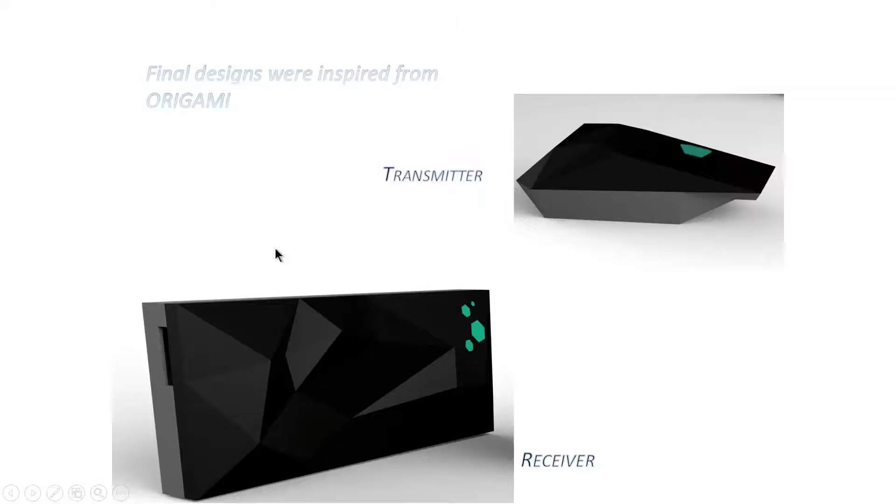Now, how do I play around with this whole thing? So, what was decided is nothing prevents us from charging a device continuously like this. So, say I have this beautiful device, why do I not pack it with batteries and connect it to my usual USB output, and then it keeps charging continuously, and once the battery is charged I can go around playing with it.

So, 2-3 different strategies have been made. One of them is take all the energy and store it in a battery. Secondly, make sure that no heat is lost, you insulate it, and thirdly you need to do some temperature control.

Some of you would have seen these devices which we use all over the place, especially wherever we have mosquitoes. This is a mosquito mat thing. This one uses a bottle and then there is a ring heater all around, and then I was trying to see, can I use that piece which is inside. So, after having searched everywhere,

we got this thing. This one is a heater which is built into flat mosquito pads. So, at the bottom we have a heater and the whole thing has been put together. Typically the rating of this is about 5 to 7 watts. So, we did an experiment on this with 5 to 7 watts, and then this one is taken from a human insulin thing which comes,

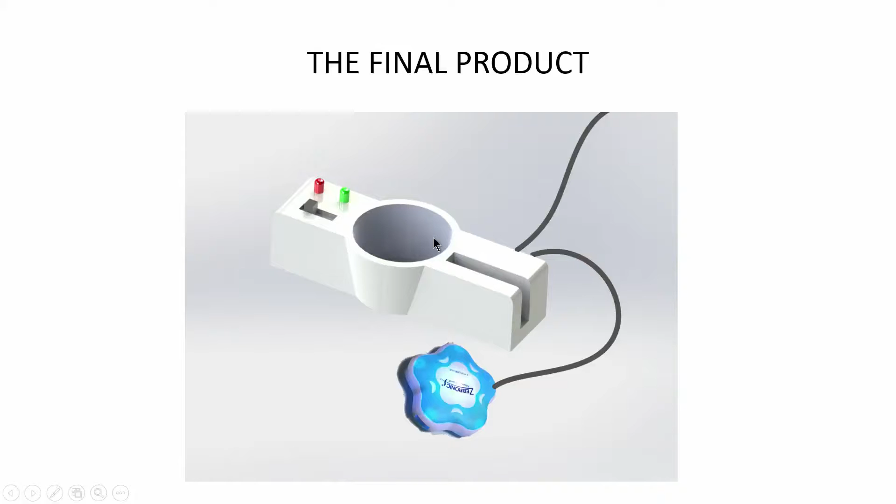So, if you have water, water does not evaporate very well when it is around 60 degrees centigrade or so. Only if it reaches 90-95, evaporation starts. So, normally, constantly keep it at 50 or 60 degrees centigrade.

Whenever you want to make tea, flip a switch, let it come up to the maximum, typically 90 degrees, and the moment you have 90 degrees, and there are two switches in, something which indicates the temperature, put either tea leaves or put a tea bag, and then steep it for whatever time you want and then take it off.

Now, we have a beautiful arrangement by which I have a tea warmer which is also a tea maker, and you see, life is very easy and convenient for me. And the same water, if I can take it and do something, I can even put it in this teacup device which I have here.

So, when we got this, it was not sitting comfortably on this, you see here. Because of the standardization, we need to offset it a little. So, my students have been good enough to make an adapter for me. So, the adapter sits on this, now I keep it here. So, probably I will heat water, or if the water is heated I put it inside,

and I have a nice beautiful valve here, and I use it like this, and these people have given me a very convenient coaster also. So, I have a beautiful thing here, it sits conveniently here, and maybe I can even keep it here and do whatever I want with it. So, I have a beautiful teacup warmer, tea maker, coffee maker.

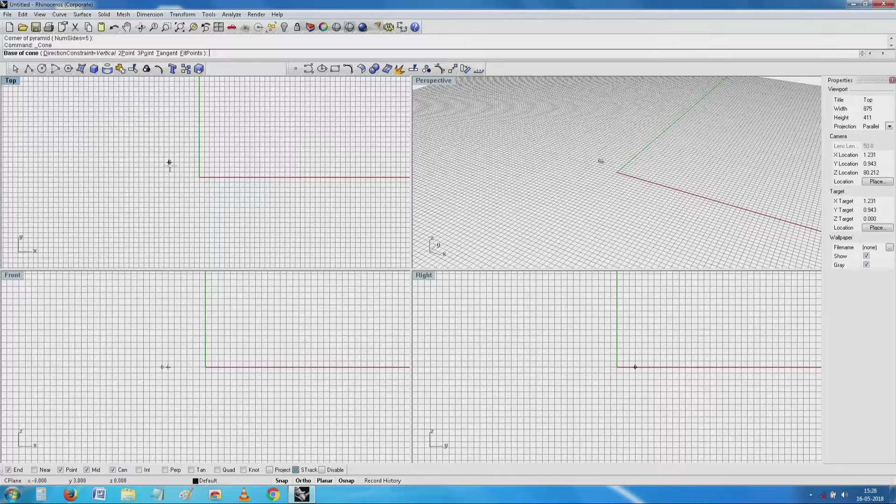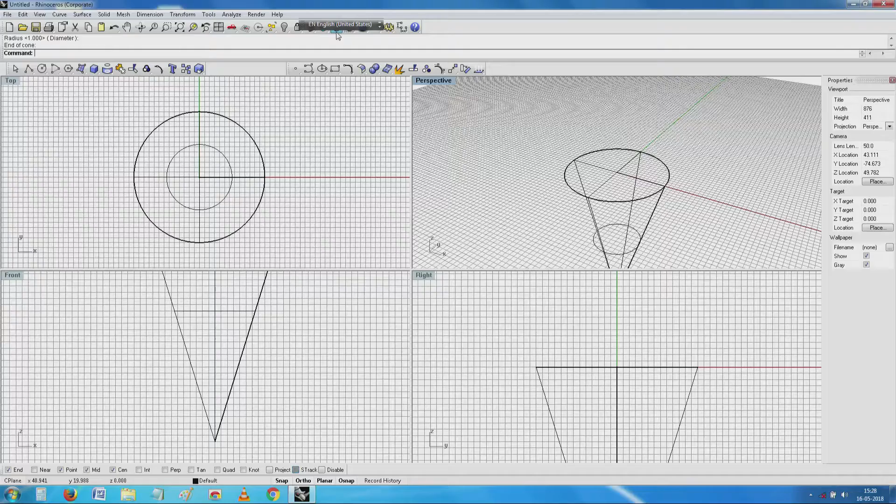See, actually there are better ways of building. See here, I have a cone already in this. How about the angle and all that? You just need to go to the shop and find out which one of these things is better for you. Now, I see what best I can do. Is there a way of making it into that product which I have shown you?

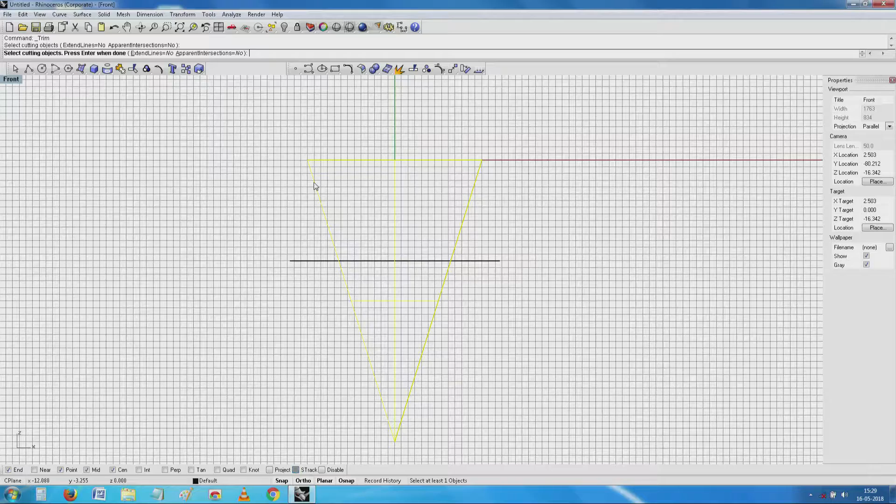The easiest is obviously to cut this. Okay. So, I have here a surface which is a cutting plane. I take this object and I try to trim it off. See, I have got something here which, if you remember in one of those pictures he has shown you, be careful about the thing.

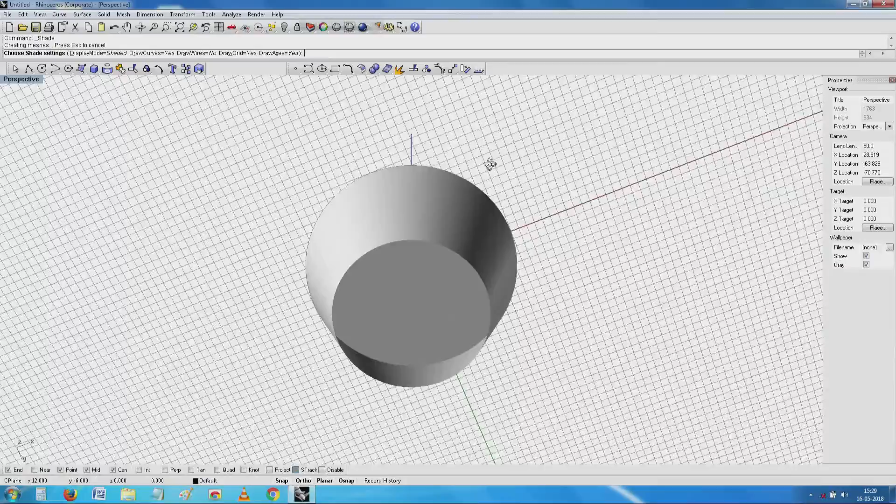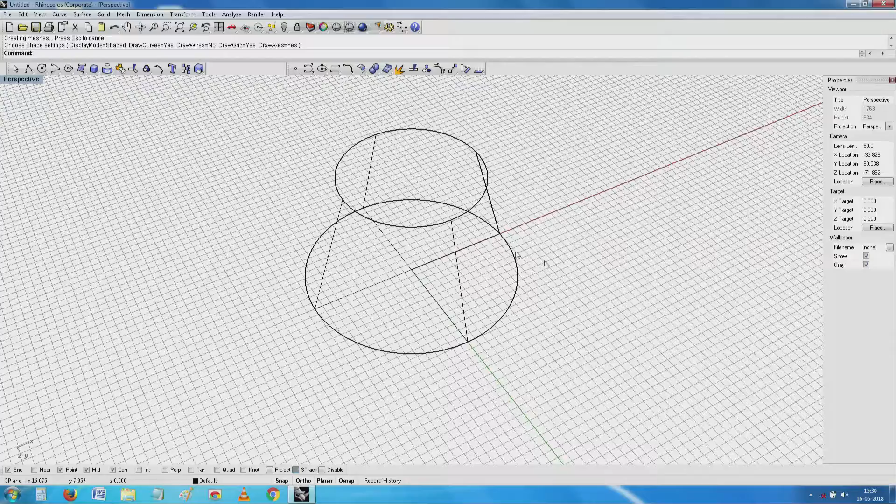This is a shortcoming of this particular program. This is not a universal thing. In this case, this being actually a NURBS based surface modeler, if you do trimming, it will end up with this. Logically, I should have done a normal regular Boolean operation. So, I will go back and do a Boolean operation and show you how stuff is easier to do with that.

See, here I have this. Now, I take a solid and cut off the material at the bottom.

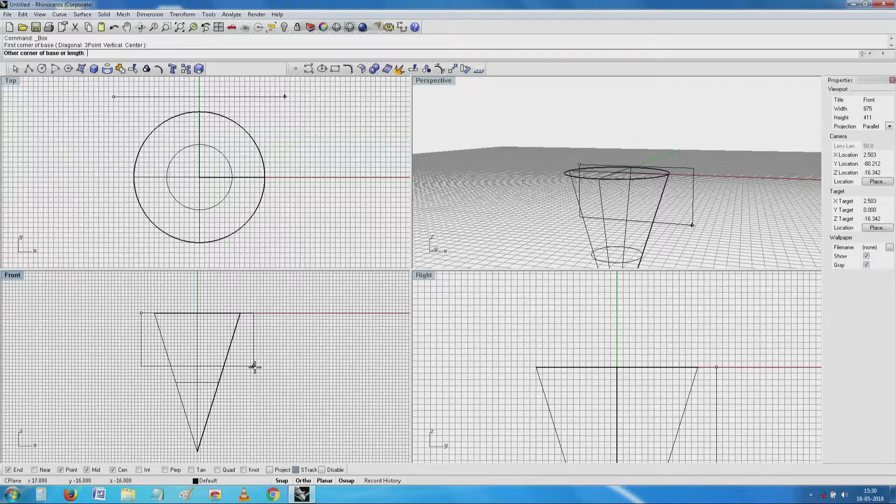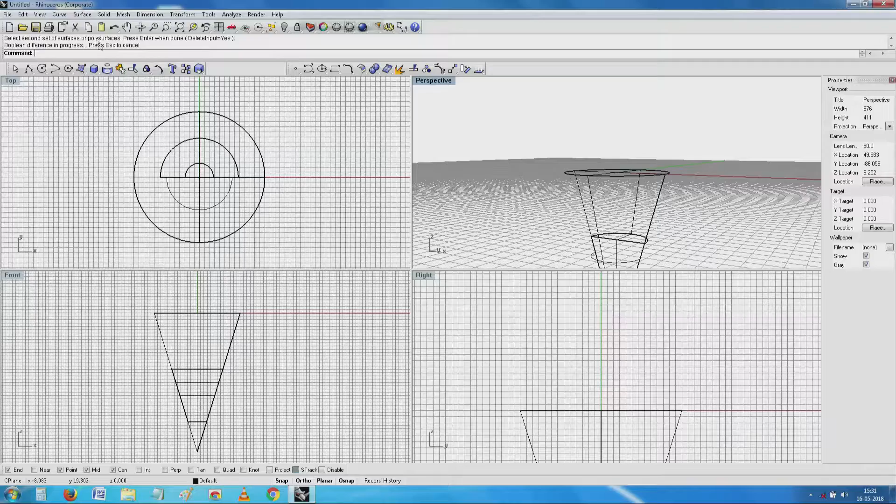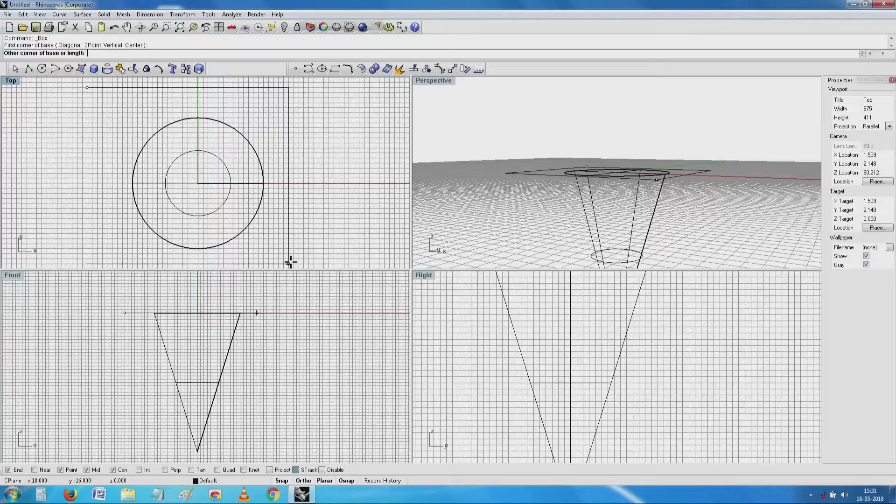Hey, what happened? Oh, very good, very good. It was not sitting here properly. See, here it is only sitting halfway. Serves me right. Now I see, I will try to, oh, it is not done properly, sorry. I make a proper solid. Take it down. Now do a Boolean.

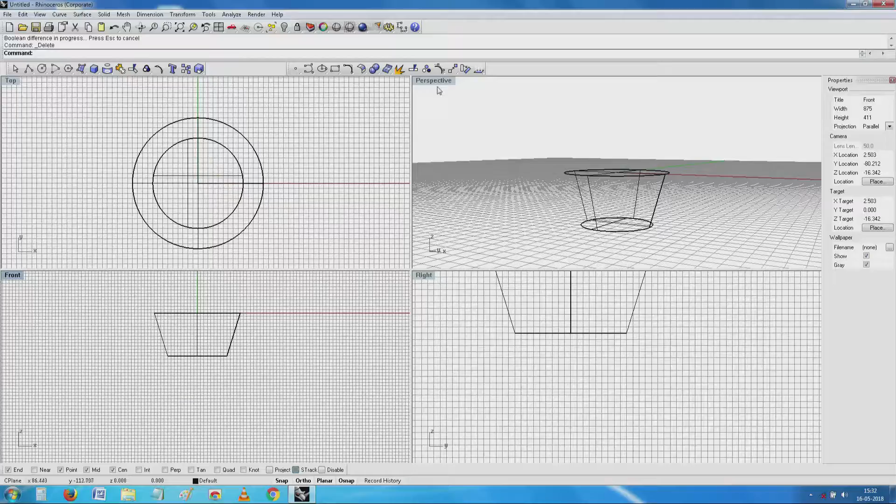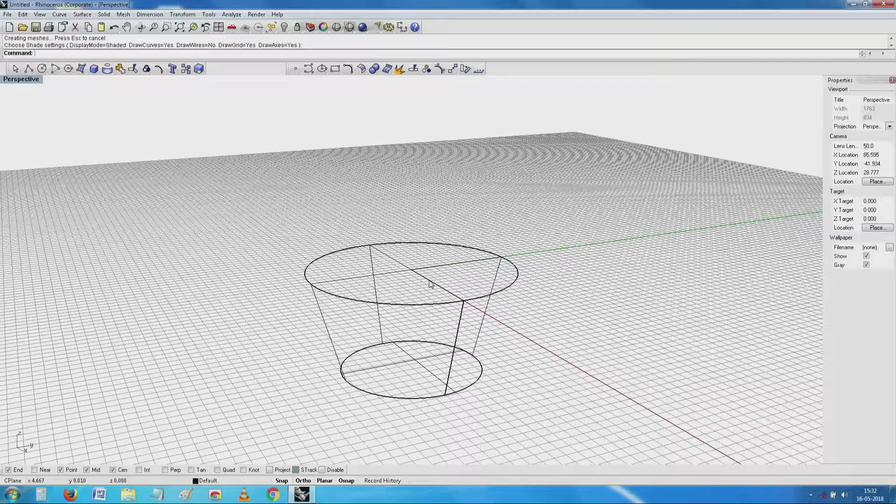So, here I have a reasonably well done cup and it is closed on both sides, okay. Top and bottom sides, both of them are closed. I am just trying to create a hollow cup. So, what I do now is make it a hollow cup by probably copying on itself again.

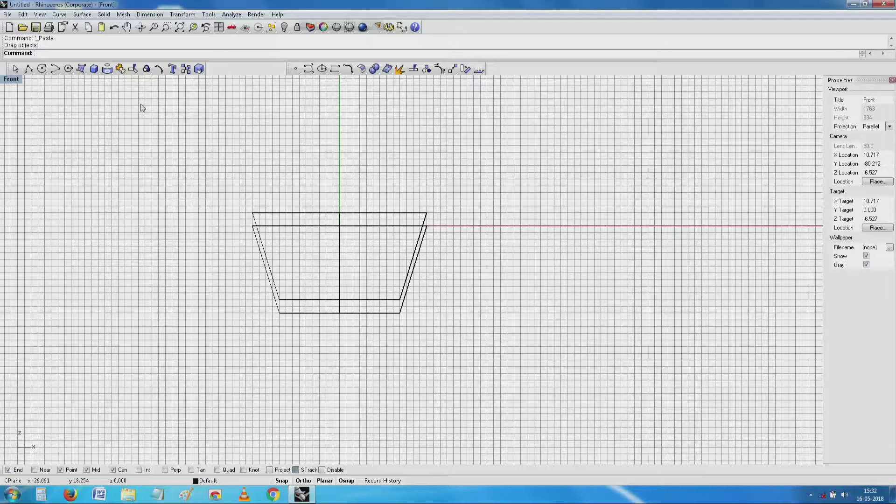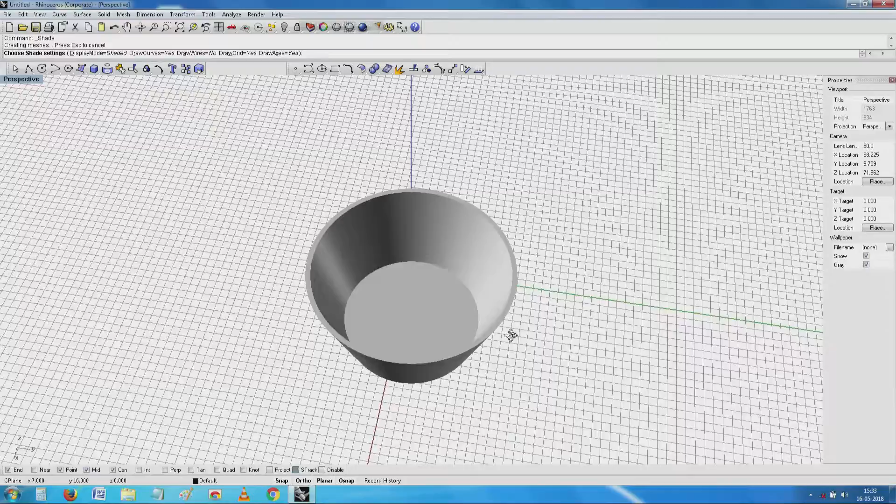And see, got it. I have a nice hollow surface here. Now, this is not exactly the cup which I am looking for. However, this is the item, and inside this I need to make sure that I put grooves so that a heater wire also can be put. This heater wire need not be of the PTC type which I was talking to you about. The PTC thing can sit inside this bottom, okay.

And I am happy that you have thought about it. What about conduction? Yes, we need to have conduction. So, it is likely that the PTC thermistor we have now will actually heat up a plate at the bottom. So, what I do is I will remove this bottom and try to make a small cylindrical plate here. I make a cylinder here by

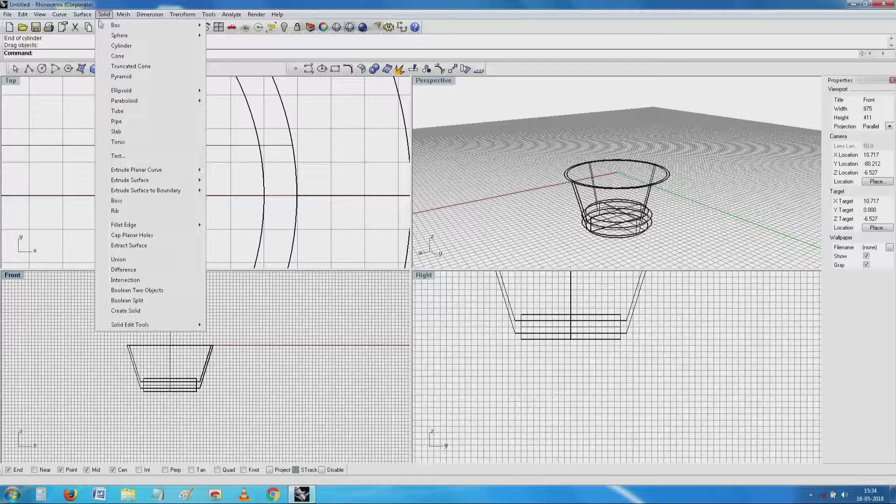see, I have a cup which has an opening inside which is quite a lot like this small thing which I have shown you here. Seen this? Now, for this base portion I have to make some arrangement by which a conductive aluminum plate or something else sits a lot like this. You have seen this here. Okay. Two things here: one is I need to make it circular, and I need to make some arrangement by which I clamp this thermistor onto it.

So, since this exercise is a little more to do with rapid prototyping and not so much to do with the other details, I will gloss over the details. I will just assume we have a nice circular plate for a

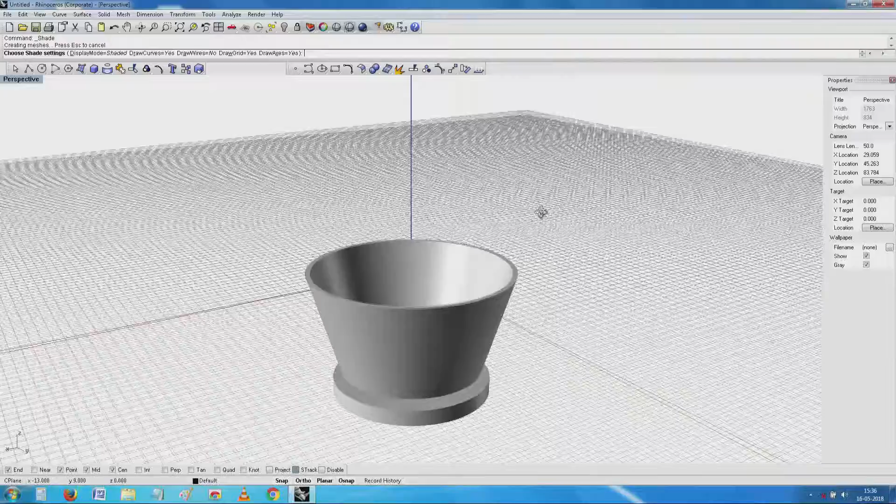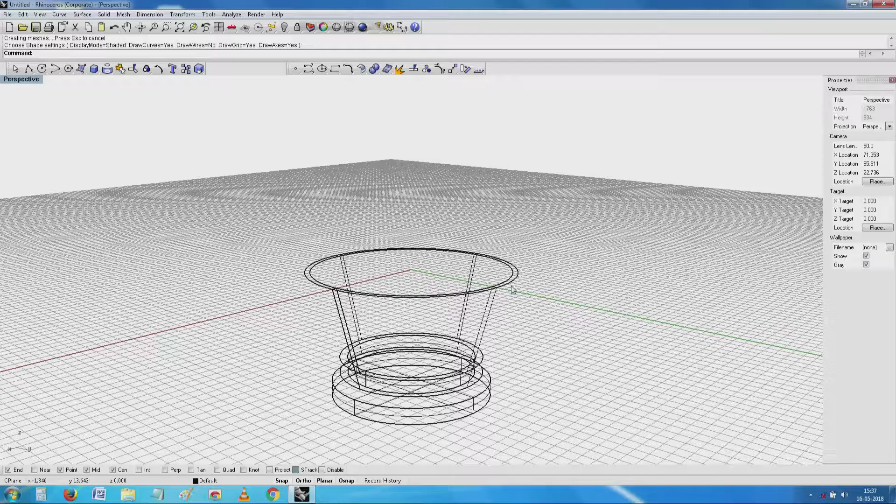see, I have a plate there which for the present I will assume is a nice thing which does all the heating and all that, and it is possible for me by various operations to maybe even make a step. I can make the step by adding another cylinder on top of it which sits neatly at the bottom.

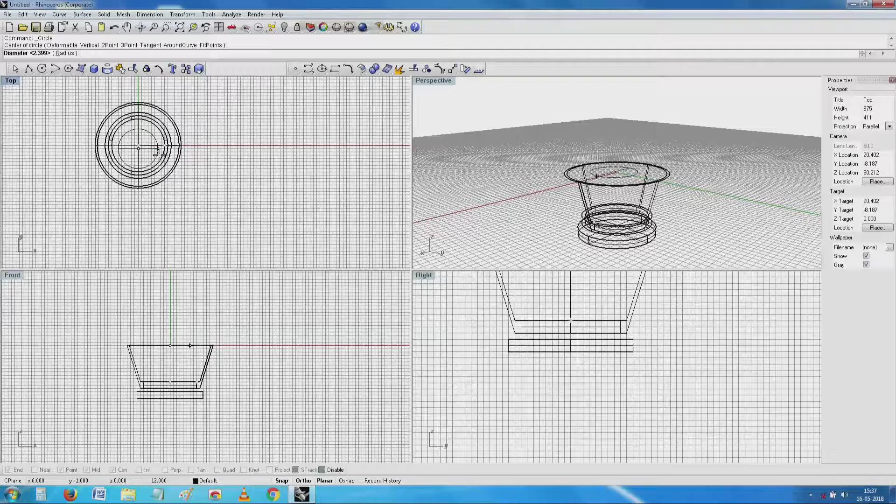Oh, I will use this circle, take it down here and see whether I can make a solid out of it. This forms a thermal bridge.

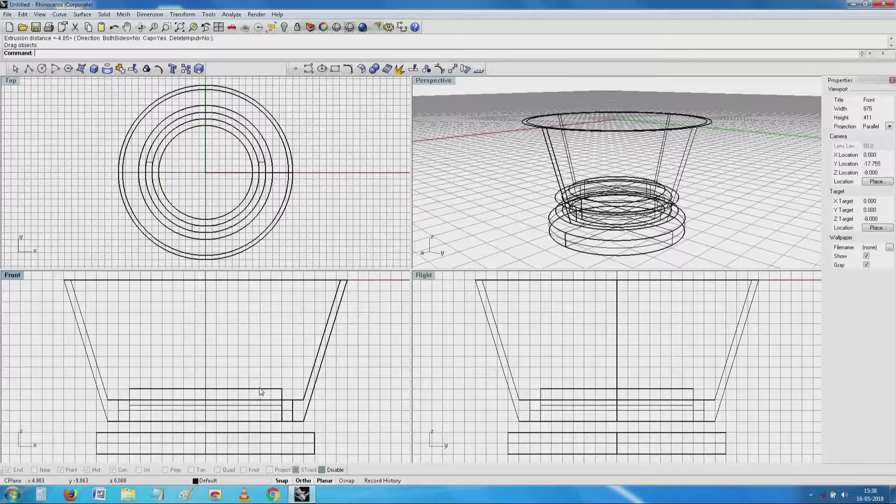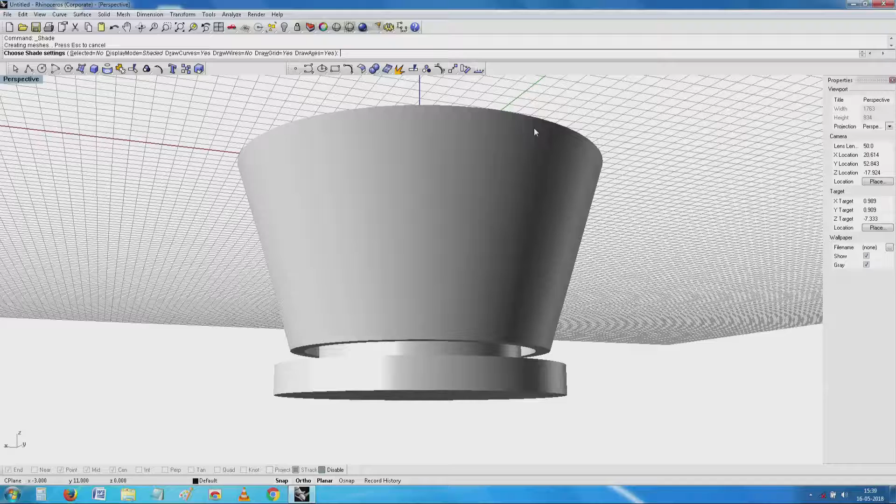See there, I have a small plate which goes through this plastic, and one or two features you will notice: it is not touching it anywhere, so that the heat is not directly affecting the plastic. I have left a small gap. Here I would like to bring to your notice insulation. All insulation works on the basis of trapped air.

So, if I take sufficient caution such that the plate does not touch the walls, that is enough of an insulation. Further, if I want, I can always put polyurethane foam. Polyurethane foam can easily withstand 150 to 200 degrees centigrade. So, I make a ring of polyurethane foam and just push it inside.

This heater will continue to heat the bottom surface of my cup, and inside of that I can have one more metallic cone in which heater wire is put. The only thing is, that heater wire may be only of the order of maybe less than a watt. So, I can have 5 volts into 100 milliamps, maybe 0.5 watt.

So, if I have 0.5 watt, that is enough to keep the edge very much warm, and further if I want to heat it and all that, I need to work more on it, but this is the starting point. Now, having this, we come to the other equally important things.